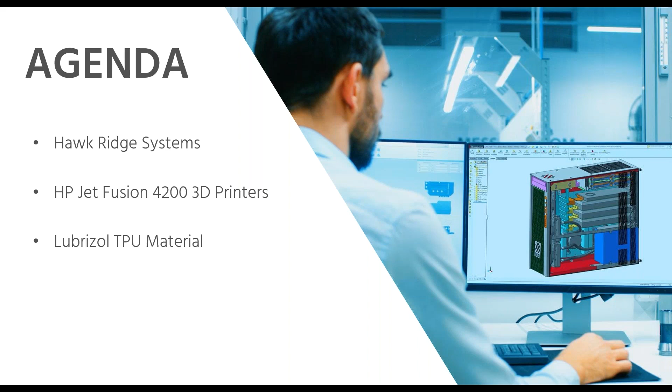All right, and I am going to pass it over to Mark so that he can share. All right, and Mark, I'm passing it over to you. All right, so I hope now it's well set up. Awesome, great. I'm close here.

Sweet. So, as Savannah said, my name is Mark. I've worked for HP pretty much since the early beginnings. Back in 2016 is when we launched the technology HP Multi Jet Fusion. Most likely you already know and have heard about it, but I'd like to make a quick refresh because I think it's a very unique technology that is worth the while to make sure that we all understand what it is and what the differences are among other 3D printing technologies.

So when we launched this technology back in November 2016, we launched it in a way that we wanted to be really disruptive on the industry. And that's what we have been focusing on pretty much since we launched it, as well as for the years previous that it took us to develop this technology.

Basically, HP Multi Jet Fusion has three main value propositions. The first one being fully functional parts. Our parts are isotropic, are really strong, and up to some degree are rivaling current injection molded parts. That's one of the main value propositions. The second one is the speed of printing. We can be up to 10 times faster than any other 3D printing solution today in the market.

And that's thanks to our single pass printing. We basically can print as many parts as we fit in a layer or in a bed without changing the time that it takes to print those. And I'm going to explain how this can happen. And the third one is the lower cost of producing our parts. We can be really, really cost effective when we compare it with other 3D printing technologies.

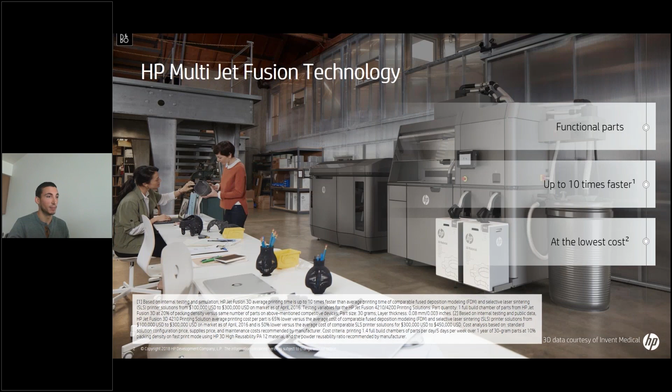So our printing process works in 4 steps. I'm going to be highlighting those 4 steps now. The first one is the printing. We are actually a powder-based technology, and we print on top of powder. There are no lasers involved in this printing technology. It's a matter of applying agents, fusing and detailing agent, on top of the powder bed.

Those agents are applied by printheads. Printheads that are industrial printheads, similar to the ones that you will find in a web press that is printing books today, for example, but at an industrial level. And of course, we modify them so they are very high heat resistant. We apply those agents that you see on the right through those printheads on top of the powder bed, shaping a section of the object that we want to produce.

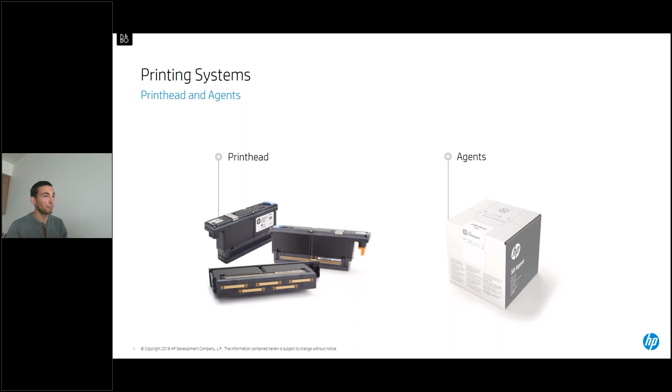How big or small those droplets are will tell us how precise that part is going to be, right? If we print one droplet that is extremely large, we're going to have less accuracy in printing that part. So here is where we have a very disruptive technology, because we can print with the same accuracy that we can print today in photos, in books, because basically we are leveraging the same core technology that HP is known for for more than 30 years.

The second process of our technology is basically fusing those parts, right? Where we have placed those agents, when we apply heat, those agents will create a reaction with the powder, and the powder will melt. And the rest of the powder that has not received those agents will not melt, and it will be ready for reuse. 100% of that powder can be reused.

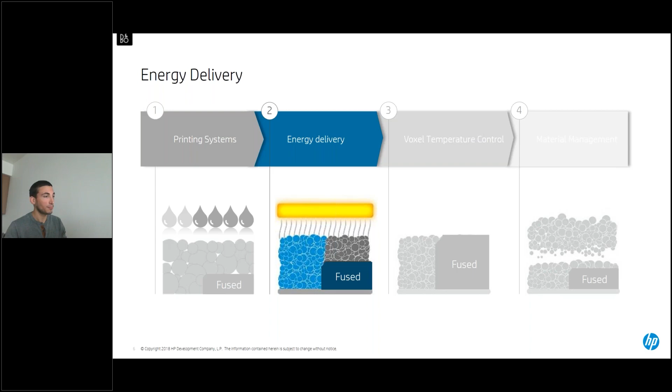This heat that we just explained is applied mainly by 2 different types of lamps. One are the top lamps. We have 20 top lamps on top of the case of the printer that are applying constant heat into the whole chamber. And then we have fusing lamps that are in the carriage that is moving back and forth on top of the powder bed, together with those printheads. So while the top lamps are constantly applying heat, the fusing lamps apply heat precisely when the carriage is moving and applying the agents.

These fusing lamps apply the additional heat that the material needs to melt, but it will melt just where those agents have been placed. All the other powder will remain fresh and non-fused.

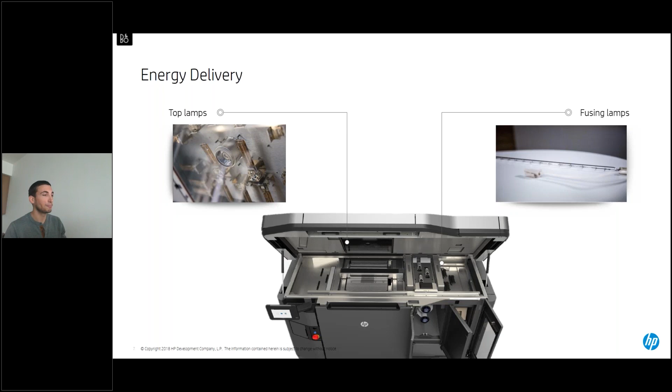Third step is being able to control with a very high precision where we melt and where we don't melt. As I explained, this is mainly driven by our printheads and the agents that tell us where we want that part to melt and where we don't, based on where we apply those agents. But we also have a real-time thermal camera, which is what you see on the left. I'm leveraging the same picture as before because the thermal camera is next to the top lamps.

This thermal camera captures 5,000 points of real-time heating control, and basically we can change how much heat we apply in each individual section of those top lamps, and we can also define how much agents we apply on the powder bed based on what the camera is reading.

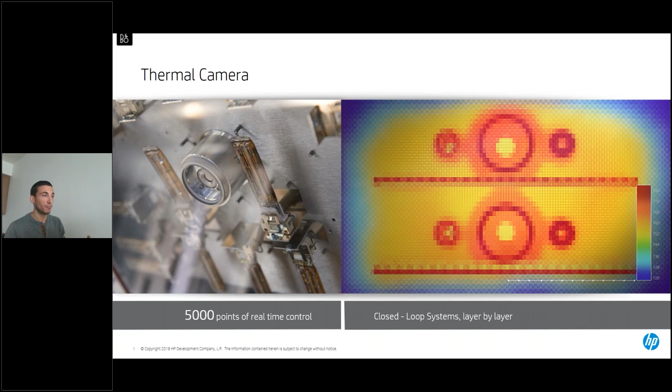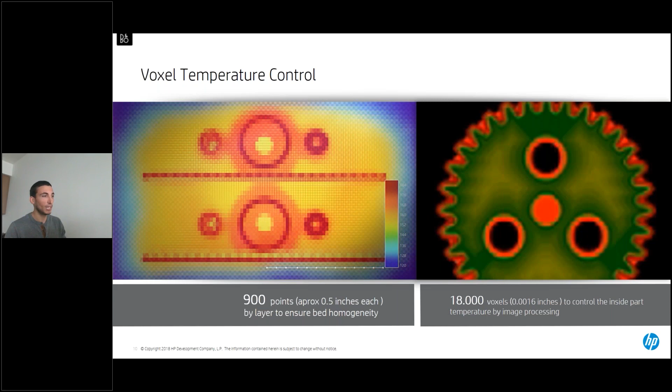Meaning, if we are seeing that the part is getting really warm because either it's very thick or has other parts that are really big next to it and there starts to be heat transfer, that camera will read it and will tell the fusing lamps or the heating lamps to lower or increase their power, and will also tell the printheads whether we should apply more or less of those agents. So we have a consistent fuse across the whole print bed, across all the parts. And this is happening in real time at every single layer. This is what achieves a very high accuracy and very high repeatability in our systems.

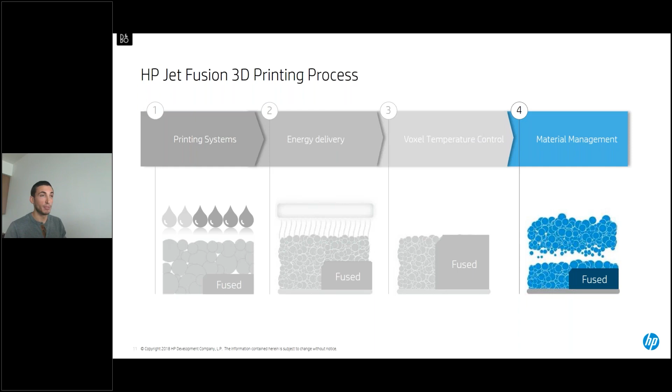The fourth point is material management. Basically, our technology is extremely clean. It's a combination of the printer, which is what you see on the left, then we have a build unit, which is that trolley on the right, and then we have the processing station.

So what we're basically doing here is that the build unit holds the part and the material, and it's shifting between printer and processing station back and forth, allowing the printer to focus on printing, so you never stop production, and allowing the processing station to do what it's meant to do, which is cooling down the parts and filling that build unit back with powder.

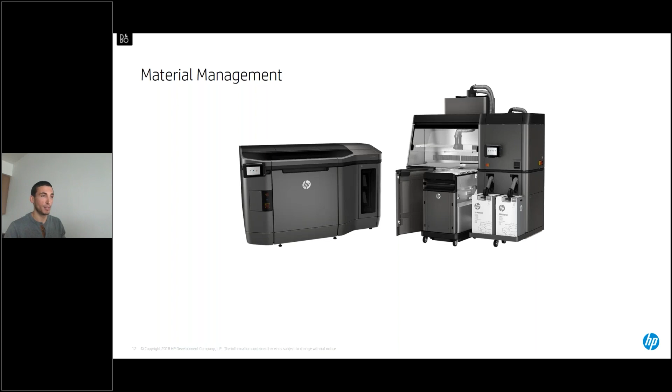So basically, if you have two build units, you can keep printing back and forth non-stop, because while one build unit is printing on the printer, the other can be cooling down. And that's one of the key benefits as well of our technology, which is the high throughput that our systems can offer. Having a quick look at our portfolio, that's our global portfolio as of today.

We have the 500 series and 300 series, which are our entry low-volume prototyping systems that print black and white and full color. Then we have the 4200, which is our mid-level production, where today we have certified the Lubrizol TPU that Ed is going to be sharing with you in a few minutes. And then we have the 5200, which is the new model that we released back in May last year, which is our most productive system.

So we differentiate between the 500 and 300 series being on the low-volume production and prototyping, and the 4200 and 5200 systems being focused on mid to high-end volume production. And then, of course, we have Metal Jet, which is our metal technology.

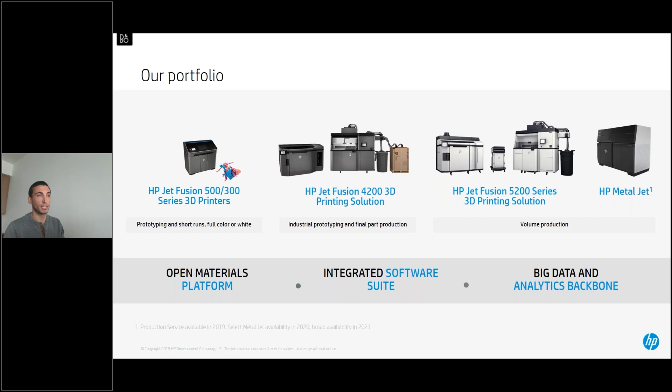To give an idea of productivity, I created this example with Magics. Well, most of you likely know Magics and work with it. This is a brake lever for a motorbike. So basically, what I tried to do is print a full job and see how many I could fit. To give you an idea, I think it's 290 parts per build we can print in a 4200, meaning that in just a single build, we can fit 290 of those parts.

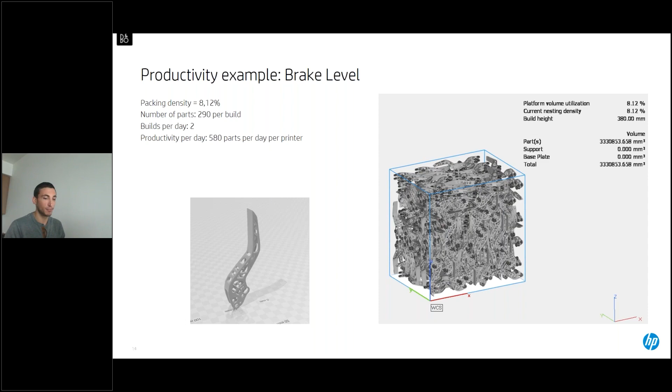And we have a productivity that allows us to print 2 builds per day, meaning that we can deliver 580 of these parts in a day, just with one printer, at a very, very low cost. If somebody's interested in knowing the cost, feel free to ask a question later.

This is another example of one of our customers. Their name is Apit. It's a great company. What they've done is they developed a frame for a face shield, and of course, they designed it in a way that we can produce more parts, and it's also very cost effective. So in just half a build, they can print 144 of those parts. And half a build will take somewhere between 5 to 6 hours to print. So imagine how many you can print in a full day.

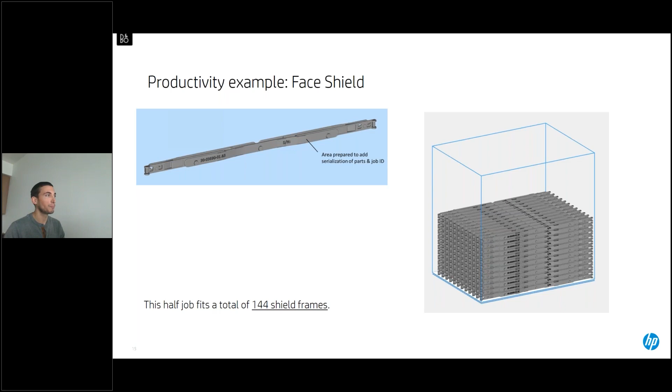These are some of our customers. I think it's important not just to say things, but also to back them up with images and examples of successful customers. So we have Forecast 3D, which is a digital manufacturer. They started their journey with us 3 years ago with one machine, one 4200.

I think it was like 6 or 8 months later, they saw the value and the disruption of this technology, and they purchased a few more. And today, I believe they have somewhere between 25 to 35 of these systems. They are a fully digital manufacturer. They get parts on time, in real time, to customers across the United States and beyond. And they are a true success case of how a company can transform and be totally digital.

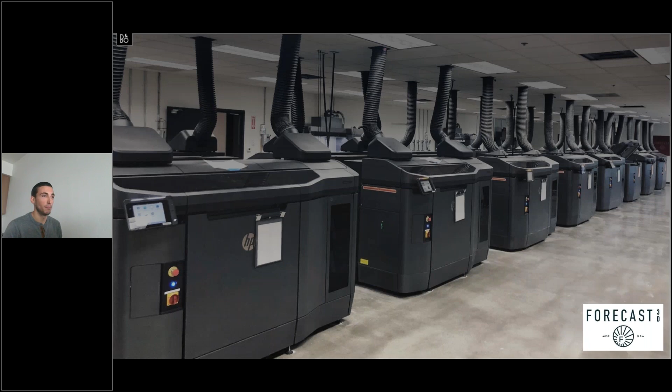This is another case of a customer using HP Multi Jet Fusion. In this case, this is SmileDirect. You probably heard about them. They produce dental aligners for customers across the States. I lost count of how many they have, but I'm pretty sure it's above 80 machines, and they do fully in-house production in real time of these dental aligners. Every one is unique, so they use many systems to produce the hundreds of thousands of dental aligners needed for their business.

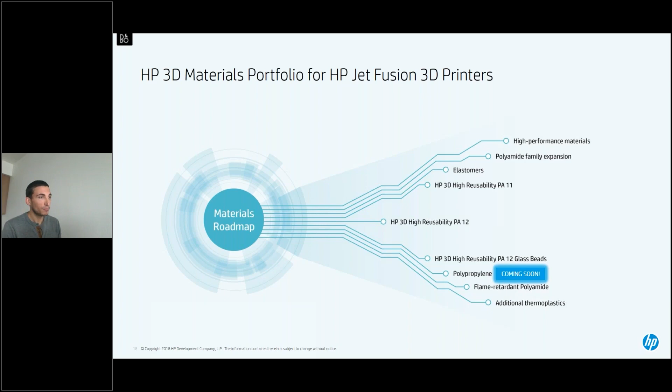Pretty much among the last slides, this is our materials roadmap. As you might have heard, we don't exclusively develop the materials for our technology, and a clear example is having Ed from Lubrizol here today explaining the Lubrizol TPU. What we do is collaborate with companies across the globe, and they develop those materials for the technology. So as of today, we have the PA11, the PA12, the glass beads.

All these are HP certified materials developed by HP. We also have the VESTOSINT from Evonik, and we also have the Lubrizol ESTANE M95A from Ed.

All of them certified for HP Multi Jet Fusion 4200 series. This is a new material that we released at the end of last year. It's been very successful for our customers, and I'm very happy that Ed is joining with us today to share with you a little bit more about this elastomer.

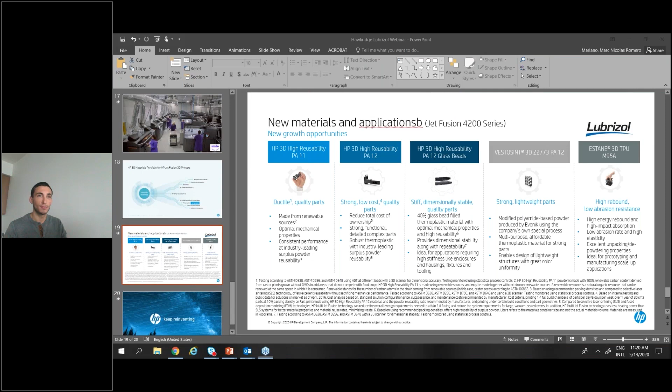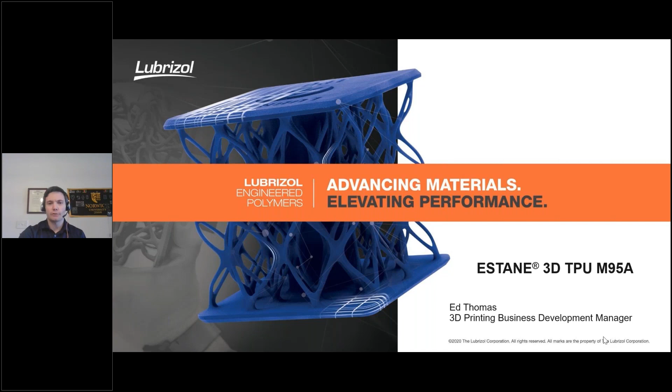So I am Ed Thomas. I am the North American 3D Printing Business Development Manager for Lubrizol Advanced Materials. And I'm here to talk today about Estane 3D TPU M95A. That is our powder TPU now available for the 4200 series of HP MJF printers. I'll just be referring to the material as M95A throughout the majority of the presentation.

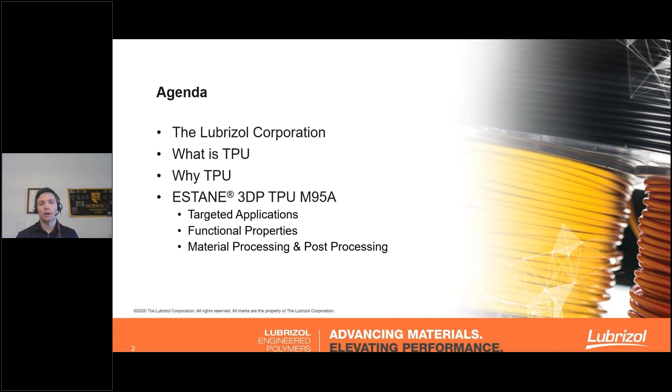So briefly, I'll talk about the Lubrizol Corporation. I think everyone here is familiar with Hawkridge. They're obviously hosting the webinar. HP has a fabulous global household brand name, but Lubrizol is traditionally a business-to-business company, so there's a lot less familiarity with us. I'll talk very generally about what is TPU, why customers would traditionally use a TPU, and then I'll spend the bulk of the presentation talking about M95A, what applications we think this material might be suitable for, what some of the functional properties of the material are, because a lot of people here today likely already have applications in mind, and then what it's like to actually process this material and post-process this material.

So first off, with the Lubrizol Corporation, we are a Berkshire Hathaway company. That is to say, we are one of Warren Buffett's companies, and that's proved pretty advantageous, especially recently, being that we are a financially strong and stable partner for the people that we do business with. But it has also provided us a certain amount of leeway in being able to pursue innovative paths, which is how we first became involved with 3D printing.

So about 2/3 of the business revolves around Lubrizol's traditional role with creating oil additives, with about 1/3 of the business being Lubrizol Advanced Materials. That is the polymer business, and that's where the 3D printing business unit is. The company does about $7 billion a year in revenue and has just under 9,000 employees globally, split between North America, Europe, Asia, and a very small presence in Latin America.

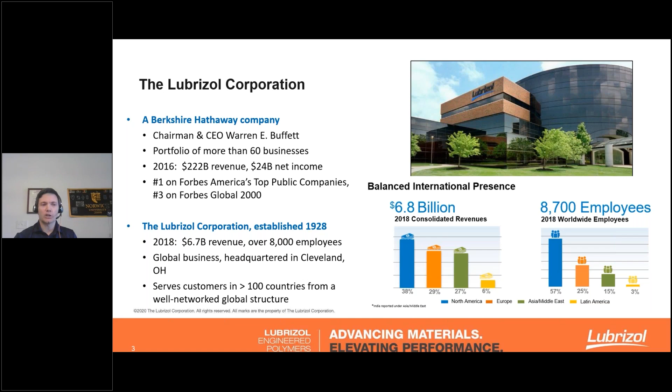So I did mention that we are a large player in the TPU industry globally, and that's a bit of an understatement. We operate 8 major production facilities for TPU globally in North America, Europe, and Asia. Currently, our 3D printing powders, such as the M95A, are developed in Brecksville, Ohio, about 20 miles south of Cleveland, with resins for 3D printing filaments developed outside Barcelona, Spain. We're also in the process of developing a 3D printing center of excellence in Songjiang, China, in Asia.

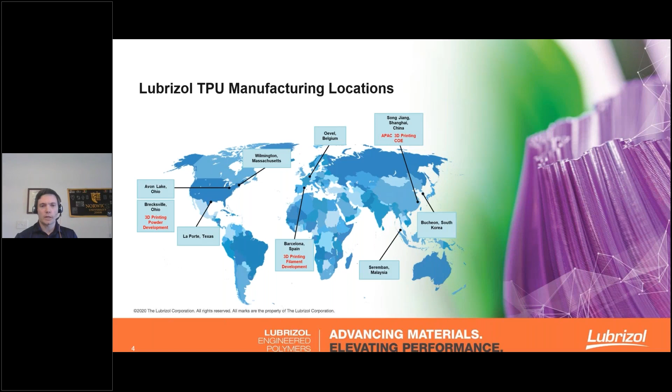So what is a thermoplastic polyurethane or a TPU? It's a thermoplastic elastomer. And the way Lubrizol traditionally describes this is that it's a material that bridges rubber and traditional plastics. That is to say, it's often soft and flexible like a rubber, but can be processed and reprocessed similar to a thermoplastic. So all TPUs are composed of three components: a polyol, an isocyanate, and a chain extender. And by changing the type of these components and the way in which the TPU is formulated, you can end up with a huge amount of distinct material attributes.

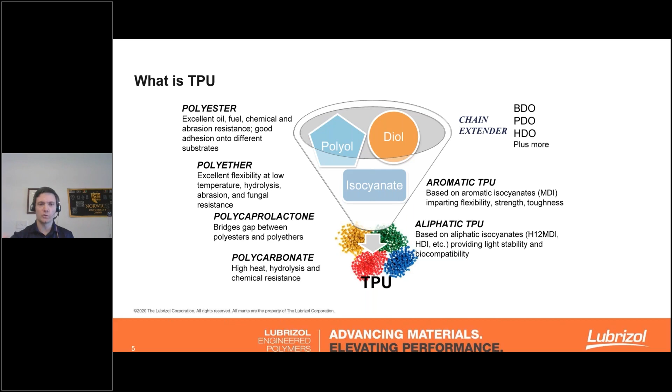So currently Lubrizol offers in the area of about 1,200 distinct TPUs offering different performance benefits. So it's an incredibly versatile material. And the reason that I bring this up is that TPUs captured a lot of attention recently on a lot of different 3D printing platforms. And while they are all TPUs, they are not necessarily comparable materials. They can all offer really different performance characteristics. So the user needs to be very aware of what they're getting.

So why do customers traditionally use TPU? And there's a multitude of reasons, from abrasion, impact, or puncture resistance to the hardness of the material.

So currently Lubrizol offers TPUs in the range from 52 Shore A, that's about the hardness of a rubber band, all the way up to about 85 on the Shore D scale. That's about the hardness of a construction worker's hard hat. So a really broad array of how rigid these materials can be.

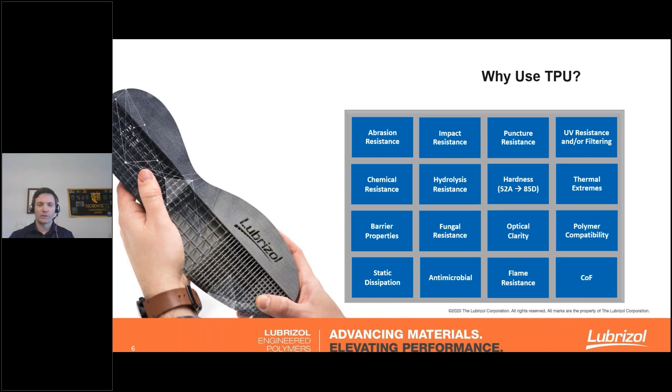But there's a lot of other reasons, including the ability to dissipate static, antimicrobial properties, flame resistance properties, or the ability for the material to remain flexible in cold temperatures. There's a really wide array of reasons why people use TPUs. And what do they use TPUs for?

So TPU can be injection molded, blow molded, extruded as a film, or even extruded as a fiber for use in high-end athletic garments, things like yoga pants. In some yoga pants, the elasticity and the stretch will actually come from TPU fibers.

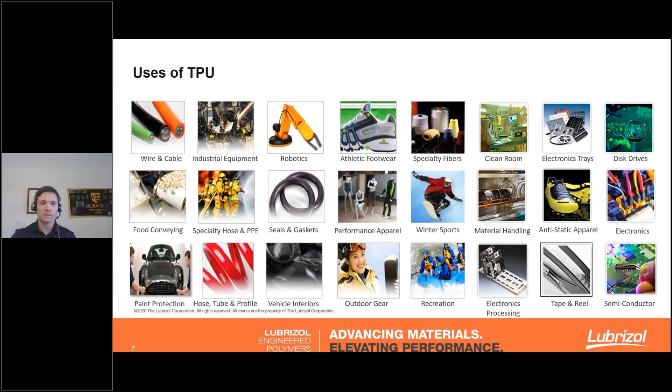But in addition to that, there's a lot of use for end-of-arm robotic tooling, seals and gaskets. Midsoles for athletic shoes is a very common use, as well as things like paint protection films or the interiors of cars. A huge array of reasons why people use TPU for traditional manufacturing, some of which are relevant to 3D printing, many of which are not.

So now that I've talked a bit about who Lubrizol is and what TPU is in a general sense, I'm going to spend the rest of the presentation talking about M95A. And the first thing I want to talk about is the roadmap that took us from initially stating that we wanted to develop this material all the way to the commercial release of the material. So it was in late 2017 that we originally partnered with HP to develop a TPU for the MJF line of printers. The material was not commercialized until late 2019.

And the reason I bring this up is that I think it says a lot about Lubrizol's efforts to deliver a safe, reliable, and consistent product, but also just how rigorous the certification process is for materials appearing on HP's line of printers. I think customers can be assured that there was a rigorous process and quality materials are making it to the end user. So that was a 2-year process.

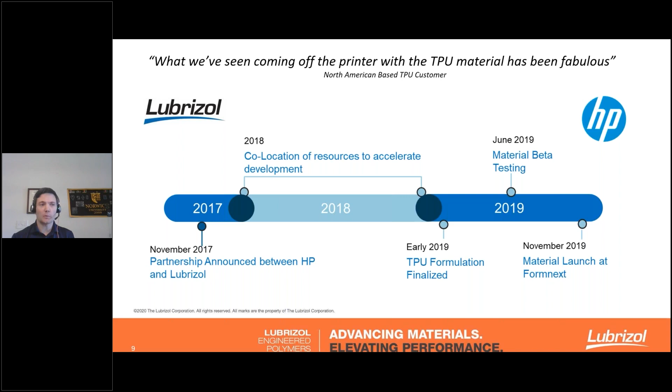We likely could have launched a commercial powder in late 2018. We entered initial beta testing with our TPU material, and while it was a commercially viable product, the feedback was that it didn't quite offer the end user the post-processing solutions they were looking for. So we actually went back, reformulated the material, and ended up launching the final product a year later at the end of 2019. And I really think this is a testament to our desire to release not only a commercially viable product, but the most user-friendly product possible.

So what is M95A? Currently it is the only TPU available for the 4200 series of MJF printers. It's actually currently the only elastomer available, although I don't know if that will always be the case. It's a hard, flexible thermoplastic material with a Shore A value of 95, but I'll explain in a minute why we think that Shore value in durometer is maybe less relevant in 3D printing than it was when talking about traditional manufacturing.

The material offers excellent elongation and flexibility with superior abrasion resistance, especially when compared to a lot of the other elastomers on other 3D printing technologies. It's also certified for skin contact applications in accordance with ISO 10993-5 and -10. On top of that, it has an 80-20 recycling rate. That is to say that in every build, 80% of the material is recycled, with 20% of the powder being first use or fresh powder.

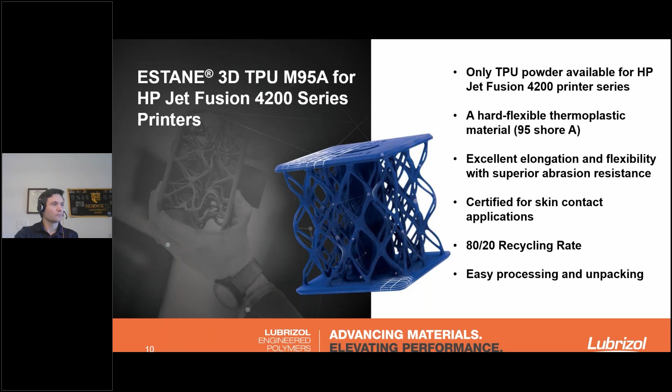And lastly, I think the thing that we're most proud of is the ease with which this material can be processed and unpacked, which I'll explain more on later. So I did mention that durometer is less of a relevant attribute than maybe it was for traditional manufacturing. And we believe a lot of that is due to the fact that with 3D printing, you can achieve a very high level of complex design, which enables the printing of things like lattice parts that offer the end user radically different properties than just what the material itself can deliver.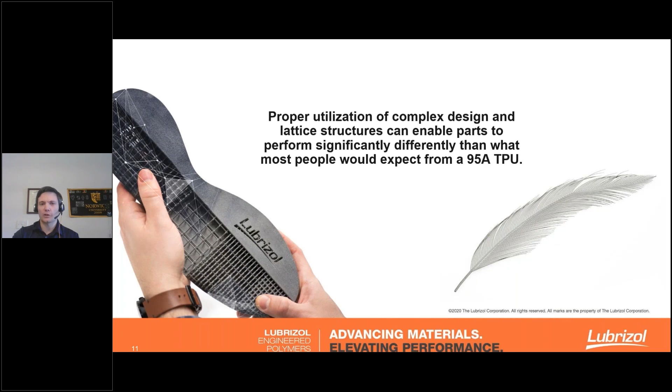So how does M95A stack up against the other materials on the MJF 4200 series of printers? And the answer is that it's not an apples to apples comparison. The nylons that currently appear on the 4200 printer are excellent materials. They are very dimensionally accurate, they are very rigid, and they are very strong with great tensile strength. But they are simply less flexible and offer significantly less elongation at break than a comparable TPU.

So we don't see this as necessarily TPU competing with the nylons that are on the printer. This is simply a broadening of the portfolio of products that are available on the 4200 series of printers. A lot of the applications that are suitable for nylon are not suitable for TPU, and a lot of the applications that are suitable for TPU could not have been accomplished by using PA12, PA12 glass bead, or PA11.

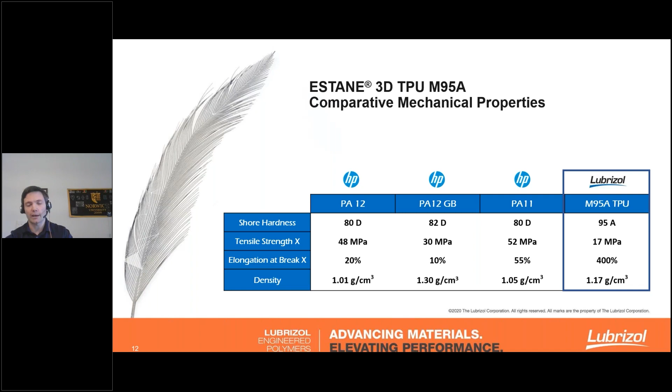So I did mention applications on the previous slide. So where do we think this material is likely going to be used, and where have we seen it used already? It's a general purpose material. That said, combined with the freedom of design offered by MJF printers, we think that there is a really wide array of applications where this material is suitable. Everything from external medical devices, such as soft insoles for diabetic patients, components for footwear, or recently we've seen face masks becoming more prominent, and the mask actually can flex with the wearer's face and makes the prolonged wear of a mask significantly more comfortable.

We also see applications for consumer goods with things like protective gear that takes advantage of lattices. We do believe that TPU latticed structures can provide significant benefits for things like impact absorption when compared with the foams that they would be replacing, as well as electronics cases that can provide levels of vibration dampening for the protection of sensitive electronics, but also industrial manufacturing, jigs and fixtures, anything that is prone to repeated abrasion and rough handling in an industrial setting. TPU is an ideal fit for that.

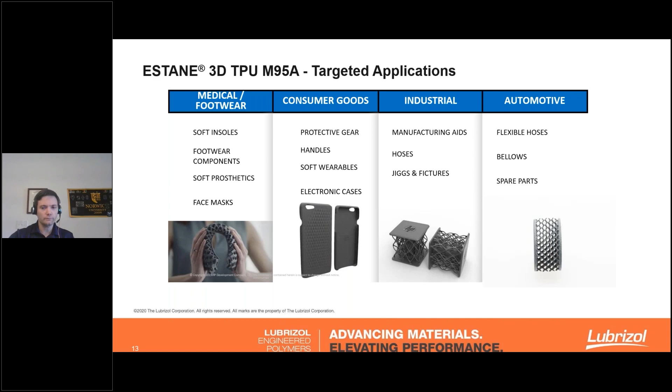So I just put that up on the screen. I know there is a lot of skepticism in the 3D printing industry as to whether footwear is really ready for prime time. I can tell you that I wore those shoes for a week during a trade show, and those are obviously not even a prototype, those are a pre-concept piece of footwear, and they were remarkably comfortable and actually durable. So we are looking forward to seeing what footwear designers can accomplish with our material.

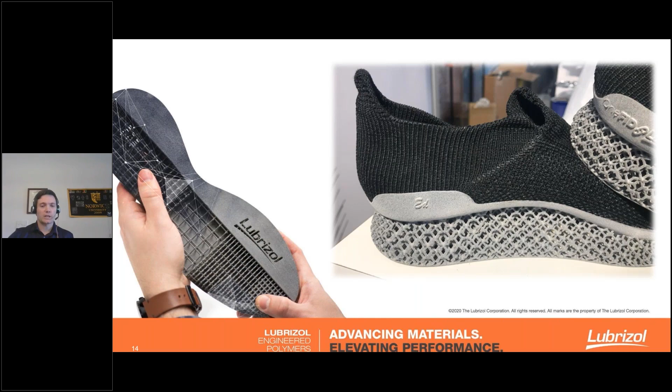So I'm going to move on and talk a bit more about the functional properties of M95A. I suspect a lot of people in the audience obviously know what industry they're in. They already have potential applications in mind, and they're curious to know if M95A is a suitable fit. So I'm just going to walk through some of the properties and some of the testing that's been done to M95A. So bear with me, I'm going to show a video here. The video does not have any sound, so your computer speakers are not broken, but it's just an illustration of material testing of M95A.

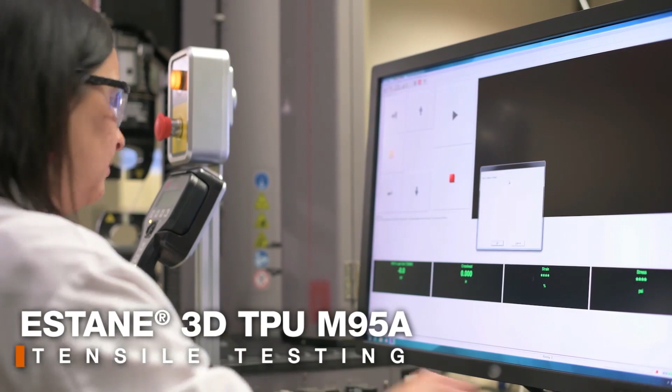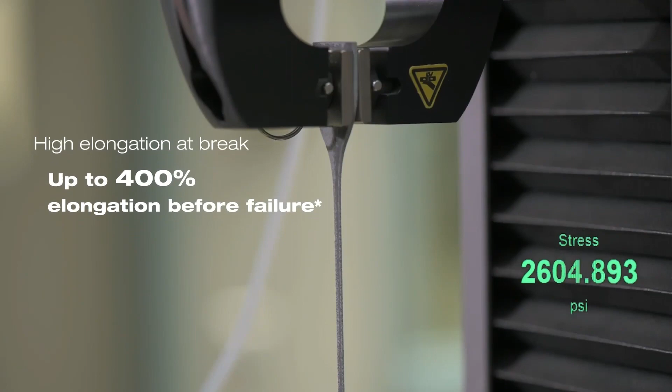So this is testing of elongation until break of M95A, which is kind of the barometer by which a lot of elastomers are measured. And we see exceptionally high levels of performance for elongation.

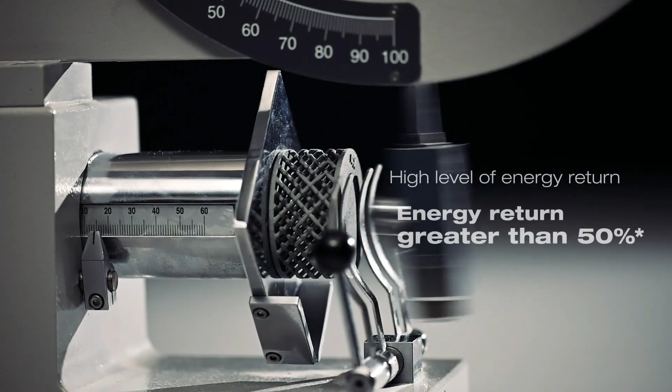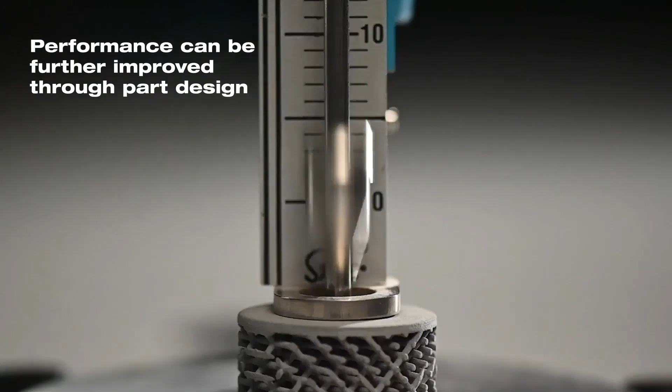Hey, Ed, do you guys have a specific method for testing these products? Yeah, we do actually, and as the video shows, you can see in the footnotes the specific test methods that were used if users want to figure out how this data was gathered. It's also contained on our TDS that can be distributed to anyone interested after the webinar. Thank you. Yeah, no issue.

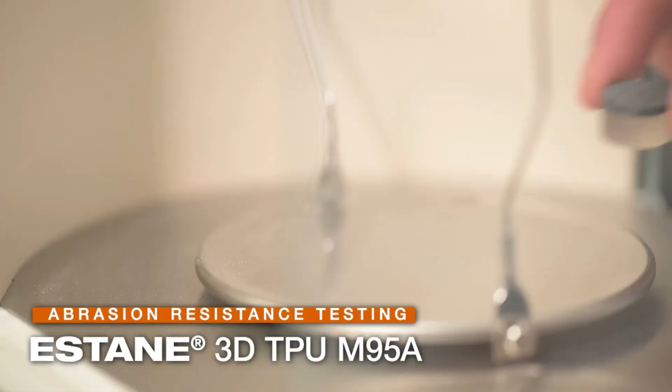And then abrasion resistance, this is something that's not necessarily the most exciting to look at, but a lot of elastomers often have relatively poor abrasion resistance properties. We believe this is an area where our material performs very, very well.

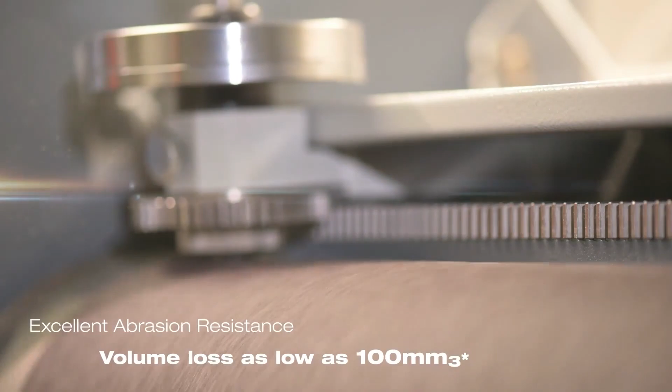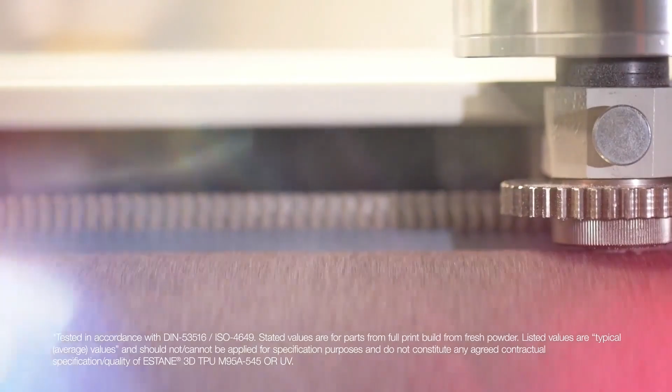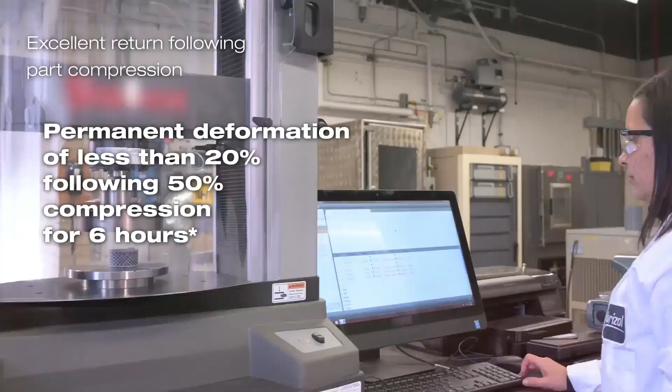This compression set testing is something we think is very relevant to the development of things like protective gear. If you were designing lattice structures for either cushioning or in the use of helmets, compression and the ability for the structure to regain its shape after compression is something that is significantly important.

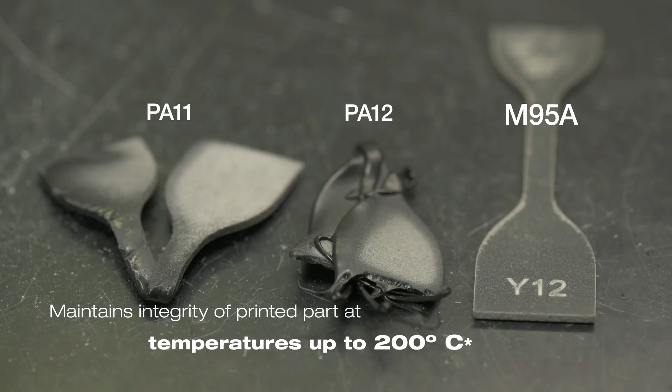And this is something that's interesting. This is temperature performance testing. In a lot of cases, traditionally, TPU would not have a higher temperature performance than nylons. In this case, we actually see very good temperature performance from our material that I'll talk about in a bit.

Okay, so we just looked through the video and some of the performance characteristics associated with M95A. The rebound testing that appeared on screen is specifically relevant to the footwear industry in most cases. But another test we were not able to capture on video was the Ross Flex test, which is, again, very applicable to the footwear industry, but I think does show the robustness and durability of our material

in a general sense. So the samples you see on screen were actually flexed to 60 degrees for 150,000 cycles at both -6 degrees Celsius, so below freezing, and 23 degrees Celsius, so about room temperature. And both the parts made it through with no cracks, damage, or failures. While this might be applicable mostly to the footwear industry, it is a testament to how robust this material can be while remaining flexible.

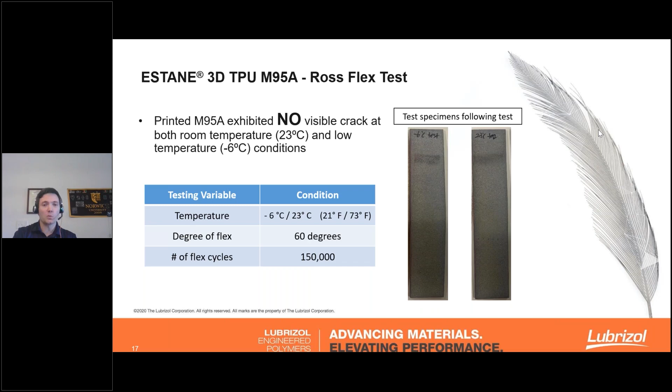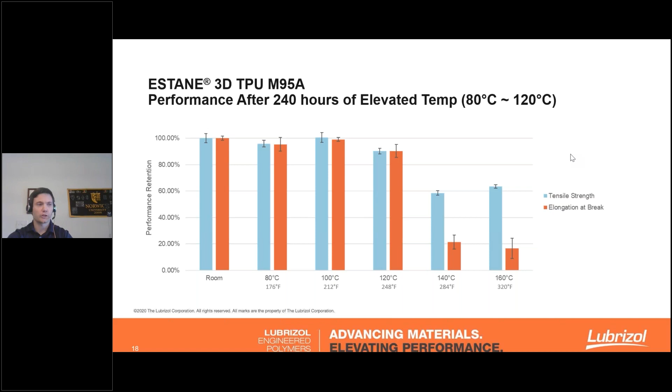We do start to see a loss in properties beyond that point, but this was a 240-hour test, so this is a 10-day test. So we are very happy with the temperature performance of this, especially compared to other TPUs. And we really think that this opens up this material for use in things like the automotive industry for certain applications.

Something that I consider to be even more impressive than the slightly increased temperature performance for a very long period of time was the ability of our material to withstand significantly increased temperatures for shorter periods of time. So on the screen is illustrated what happens when the material is brought up to 200 degrees Celsius, or just under 400 degrees Fahrenheit, for up to 18 hours. And again, while you see a decline in material properties, specifically tensile strength, the material itself does survive and it remains structurally intact, which is really impressive for a TPU.

And we've already seen this impact certain applications, like the ability to produce certain industrial fixtures. There was an industrial application that required 3D printing of a factory fixture that would be exposed to really high temperatures during an annealing process. And it made sense to 3D print these parts.

Other materials were melting before the 200 degrees Celsius mark, and really high temperature plastics were cost prohibitive for the specific application. And our TPU was certified for use as that part, which is something that is really interesting and not something we predicted early on, but we are very happy with the temperature performance of our material.

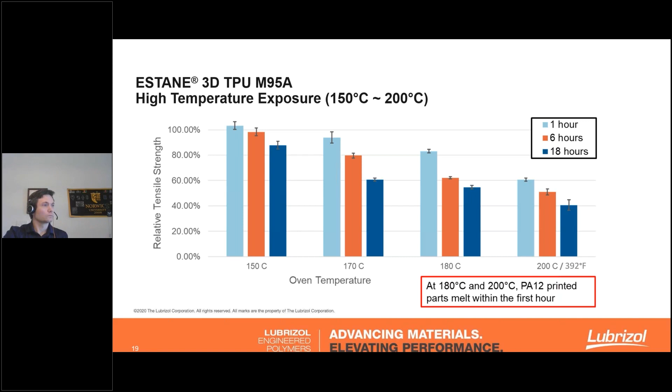And the last thing I want to talk about for performance attributes is the hydrolytic resistance of this material. This doesn't necessarily relate to a specific application. This relates more to the environment in which a lot of 3D printed parts happen to be used. A major issue for a lot of TPUs is that they might not be hydrolytically stable. So M95A was exposed to 90% relative humidity for 8 weeks with minimal to almost no loss in observed tensile strength. So we can consider the material hydrolytically stable.

I know, I used to live in Georgia and those summers were miserable. So I do understand how important the ability of parts to survive in increased relative humidity is.

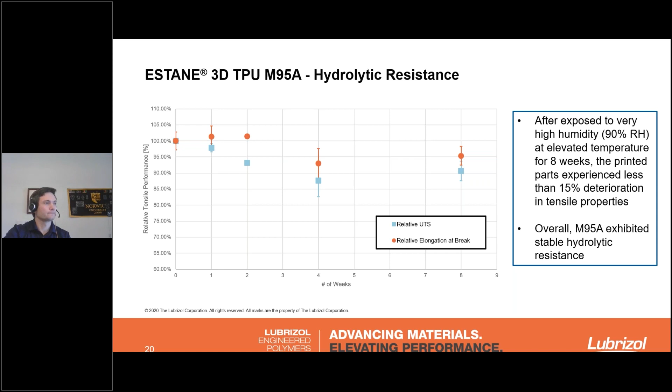And now I want to talk about one specific application. So I'm going to talk about what this is, why it made sense to 3D print it, and then why it made sense to 3D print in TPU. So this application was designed and produced by Forerunner 3D, a small service bureau and engineering firm out of Michigan that does really excellent work.

And this part specifically is an industrial fixture for handling chrome door handles for the automotive industry during assembly. It fits on a rotary dial machine and handles the chrome door handle as it is affixed to the rest of the door. So why did they want this part 3D printed? And the first answer is speed. These parts can get to the customer really rapidly, especially given the iterative nature of the automotive industry. That made a lot of sense.

But these parts are also limited run, and it didn't make sense to spend the money on tooling for all of these parts. Traditionally, they would have cast urethane these parts, but that does cost 2 to 3 times the amount that this 3D printed part cost. So in a general sense, it made sense to 3D print for this specific application. And why did they select TPU for this application? There's a few reasons why.

The first is that TPU out of the Multi Jet Fusion printer platform is remarkably dimensionally accurate. This allows for a good fit of the chrome part into this fixture during assembly, just for the purpose of a consistent manufacturing process. But the material is soft enough that it won't mar or damage the chrome finish of the part before it is fixed onto the door.

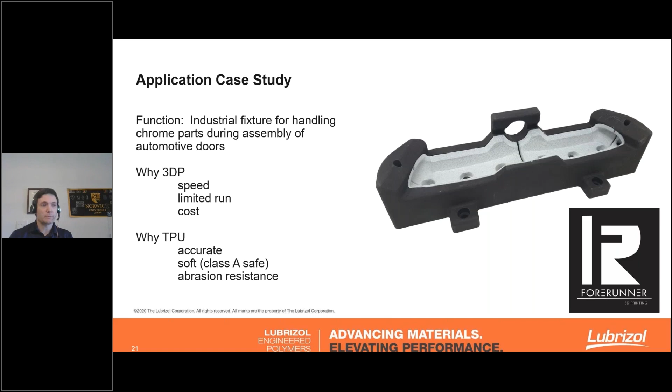So I talked a bit about applications. I'll move on to talk about what it's like to process this material through a 4200 printer and what the post-processing experience is, because that's an issue for a lot of elastomeric 3D printing products. So material processing, and the first thing I need to say is that this material was designed with the intent to make as user-friendly a product as possible. If someone is familiar with printing with an MJF 4200, likely nylon 12, we wanted the experience with the TPU to as closely resemble that operator's experience with the PA12. And we think we've been able to accomplish that remarkably decently.

So first, the packaging is exactly similar to PA12. It comes in 30-liter and 300-liter packaging. We are currently working on bulk packaging, although we don't have a timeline for delivery. Printing time is slightly slower than PA12. We're looking at about a 19.5-hour build for a full build of M95 TPU. That said, the packing density is again very similar to what users are already used to, with a packing density suggested between 7 and 8%. And then there is the 80-20 refresh rate, which is similar to what people are used to with PA12. That is 80% of the powder is recycled from a previous build, with 20% of the powder being new during each print.

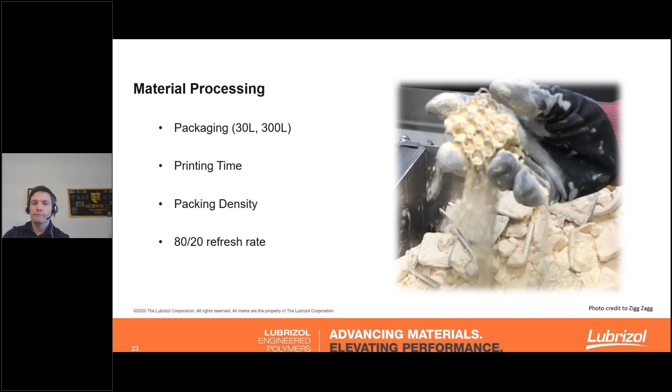Now, the thing I want to talk about next is the unpacking, which is often an issue for a lot of elastomeric 3D printing products. So when heated, a lot of elastomers have the habit of becoming what people describe as tacky or sticky. So the powder has the habit of adhering to itself in clumps or adhering to the 3D printed part. So it doesn't really matter if you can 3D print a very complex lattice shape. It's really of no use to anyone if you can't remove that 3D printed part from the powder in a cost-effective manner. And we think we've developed a powder that comes very close to simulating the unpacking experience of PA12.

So I'm just going to show a quick video of what that looks like. For anyone familiar with the printing process, I really think this is a good testament to what it is like to work with our material.

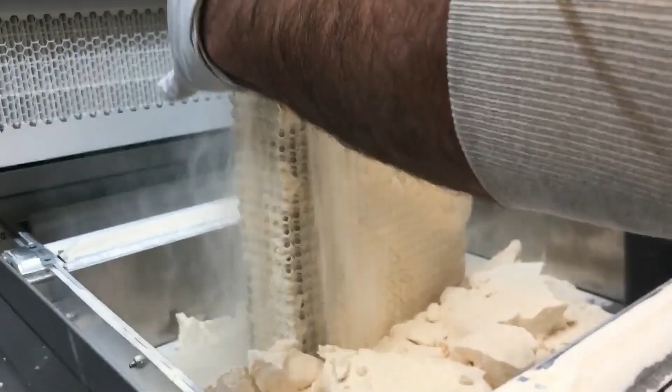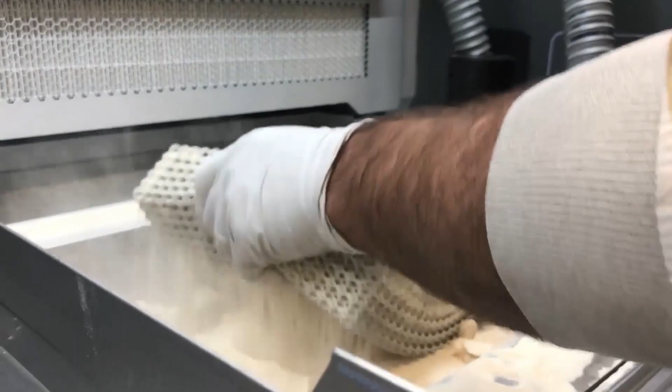So again, there's no sound, you're not missing anything here. But if you're familiar with unpacking 3D printed parts, this is a pretty good experience. The powder is pouring out of the lattice structures. He's able to flex the parts. And there's not a huge amount of labor-intensive work to depowder what is a very, very large lattice structured object. So we think that is a good testament of what our material is like to work with.

Okay, and the last thing I'll talk about is post-processing of M95A. And again, this is made to really closely simulate the experience people have when working with other materials on the MJF platform. So there's no difference in process when it comes to bead blasting this material. No special blasting cabinet is required. The normal tools that are in the shop are perfectly acceptable when working with M95A in most cases.

Again, dyeing, most of the dyes we've seen in circulation in North America are perfectly compatible with M95A TPU. There's a couple exceptions out there, although we are perfectly happy to make the recommendation on what dyes are optimal and what dyes are preferred. A lot of coating solutions are also compatible with M95A.

The issue is that a lot of surface coatings that are currently in existence are designed for rigid structures. And while they might successfully adhere to the TPU, the part then either loses its flexibility and there was no reason to print in TPU to begin with, or the coating has a habit of cracking or flaking off of the printed part, which is also not a great sign. So we're in the process of developing a proprietary flexible coating solution that will adhere to the TPU substrate, provide some level of surface smoothing, and flex with the 3D printed TPU.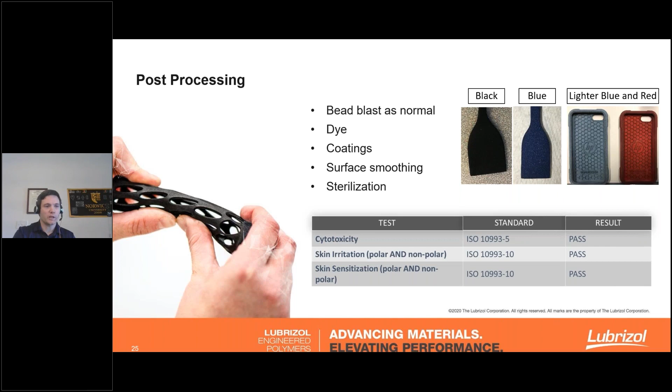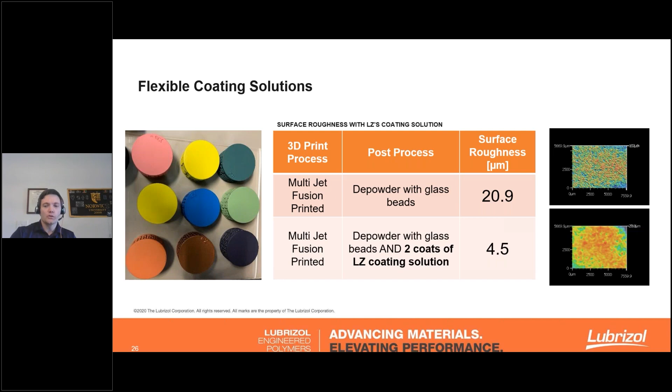And this is just a little illustration of the flexible coating solution that will be available for TPU. It's currently in the beta testing phase, but it's a way of providing vibrant colors, some level of surface smoothing, and a flexible spray coating that adheres to TPU and actually flexes with the material, which is really amazing to see, actually. So with that, that is the final slide I had for the presentation to talk about M95A.